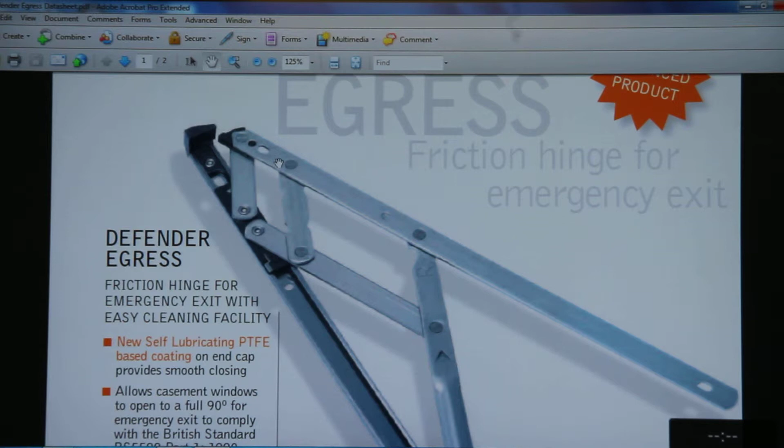Now we can see the Defender Egress friction hinges for the emergency exit with the easy cleaning facilities. So here we can see the plastic end caps. Due to this end cap, the moving in and out of the friction hinges is very easy, and it allows the casement window to open to a full 90 degrees for emergency exit.

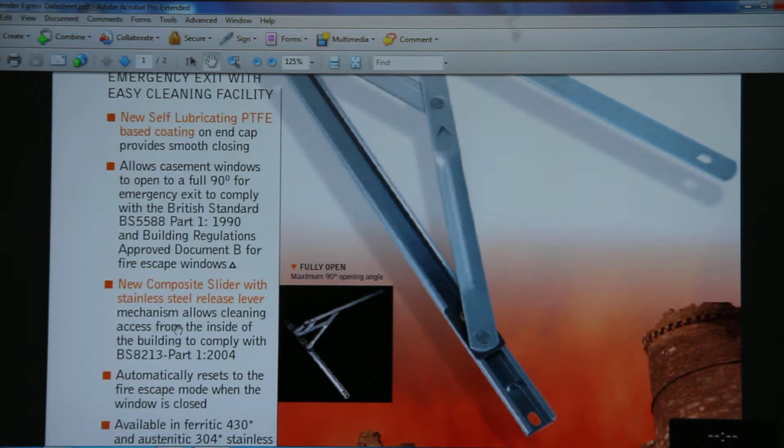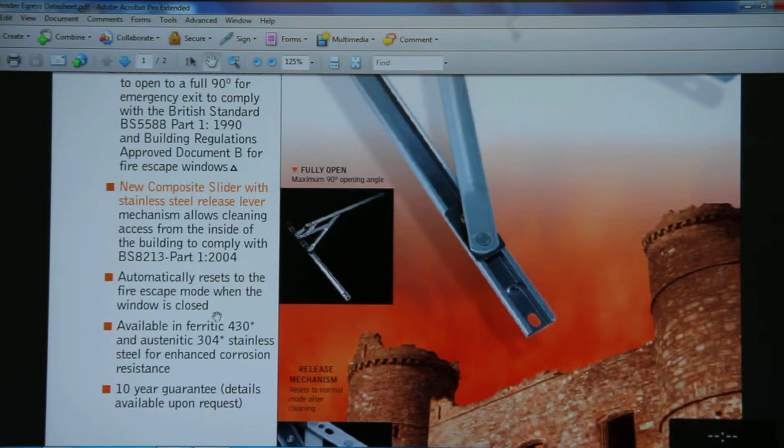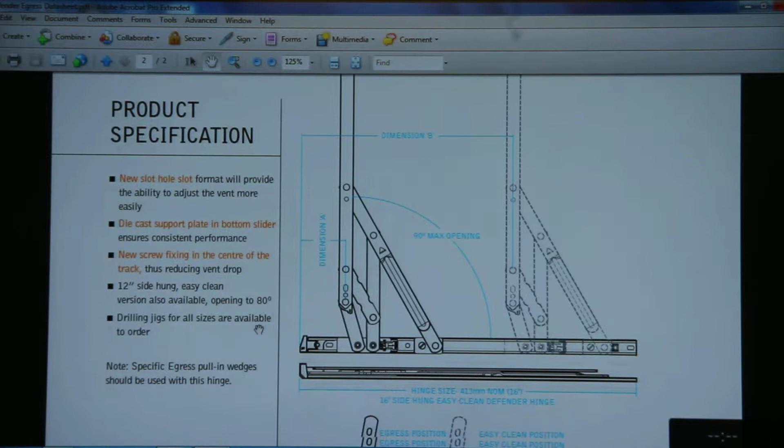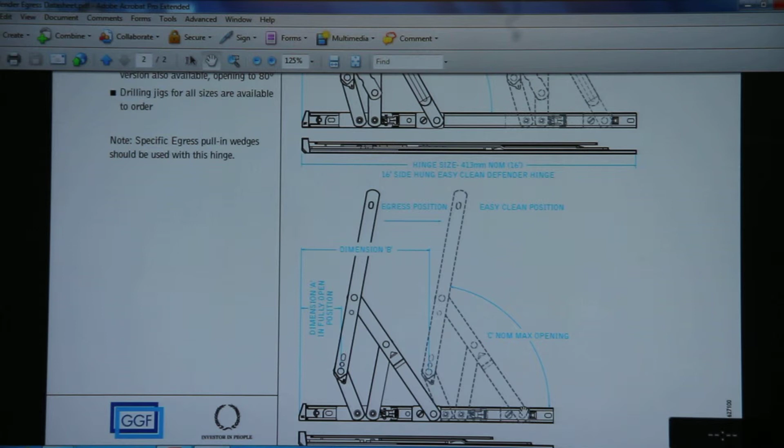New composite slider with the stainless steel release lever mechanism allows cleaning access from the inside of the building. Automatic reset to the fire escape mode when the window is closed. Now here we can see some more technical issues, like this is the opening angle of the friction hinge, how we can open and clean the window.

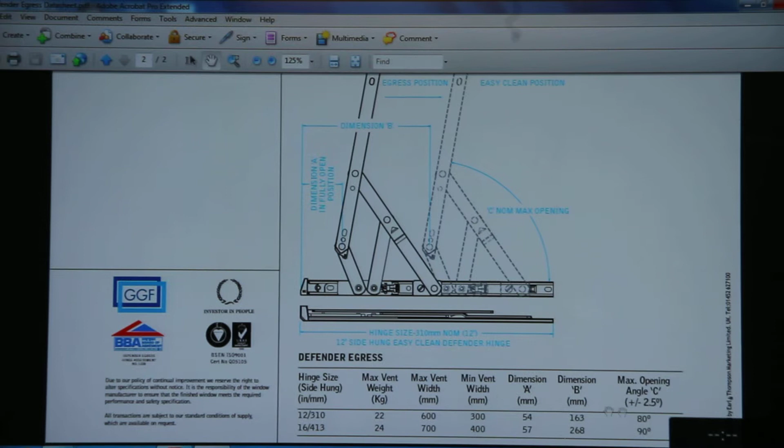Here we can see how much vent weight we require for the Defender Egress. We want 22 to 24. Due to 22 to 24, we can use the Defender Egress maximum vent weight, and the angle is 90 degrees. This is our 12 inches side hung easy cleaning Defender hinges. So this is the EDSC 12.

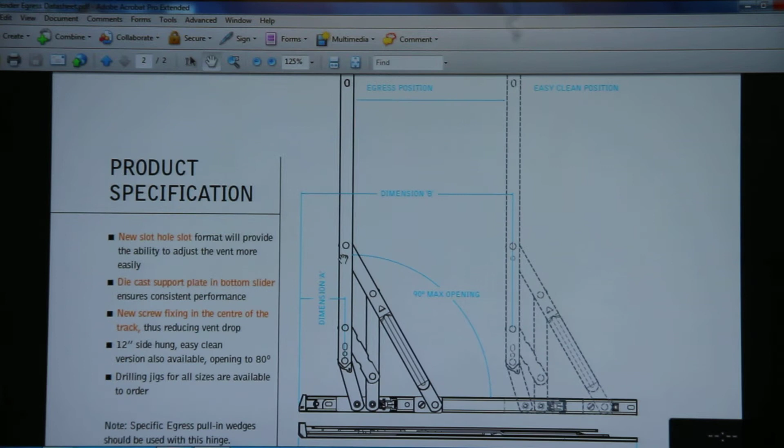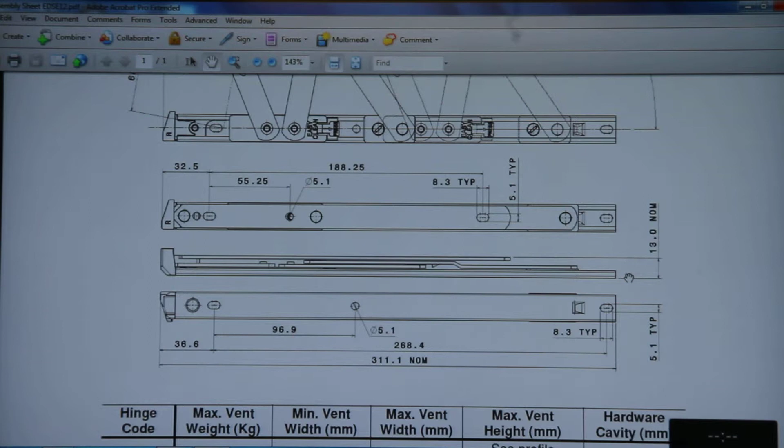This is the egress position, and this is the opening. We can see the 90 degrees. You can open it. Here we can see hole dimensions and the other parameters for the friction hinges. EDSC 12 is the 13 mm stack height. You can open this up to 80 degrees.

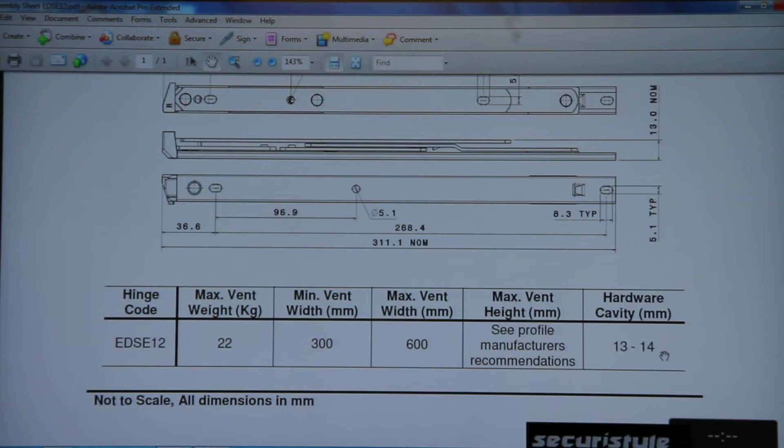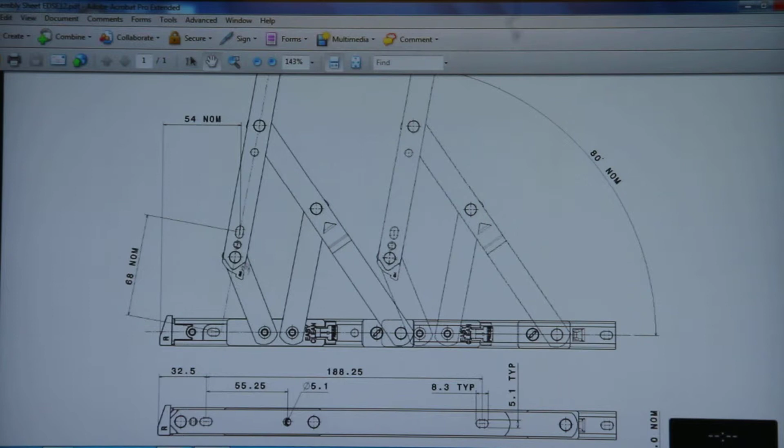These are the parameters for the EDSE12. Maximum weight it can bear is 22, and the maximum width you can go with the EDSE12 is 600, and the hardware cavity is 13 to 14. These are the easy cleaning buttons; by this we can easily clean the area of this friction hinge. This is the asymmetrical arrowhead. When it comes here, it will close, and like this we can close it.

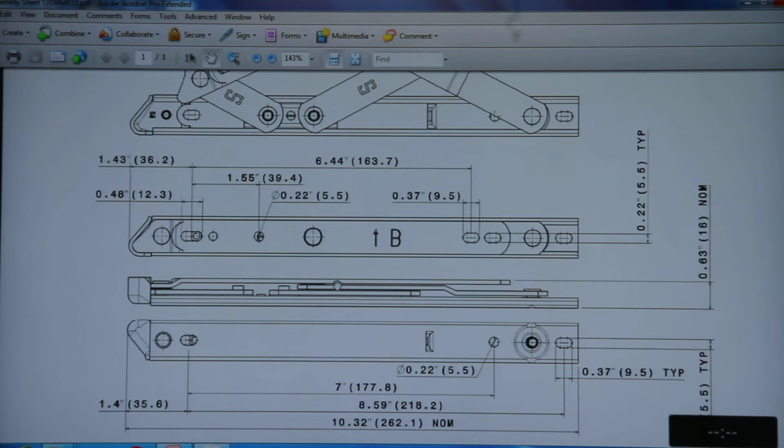Now we can see this Storm. There is one arrow. By this we can see how we can open the Storm balance. It's in 16 mm stack height. Storm 10 means 10 inches, and it stands for the Storm. The maximum height we can go is up to 635.

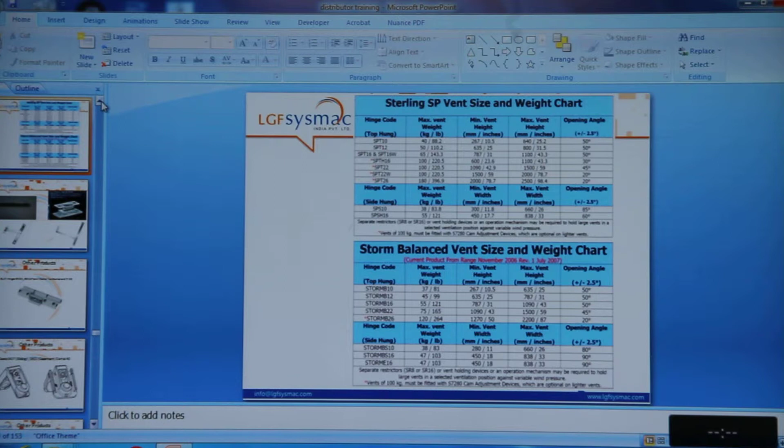How can we separate the friction hinges from Securistyle? 30,000 cycles giving the 100 years value, and each stay is tested in salt spray for 500 hours to avoid corrosion. Lipped plastic slider to avoid metal to metal contact.

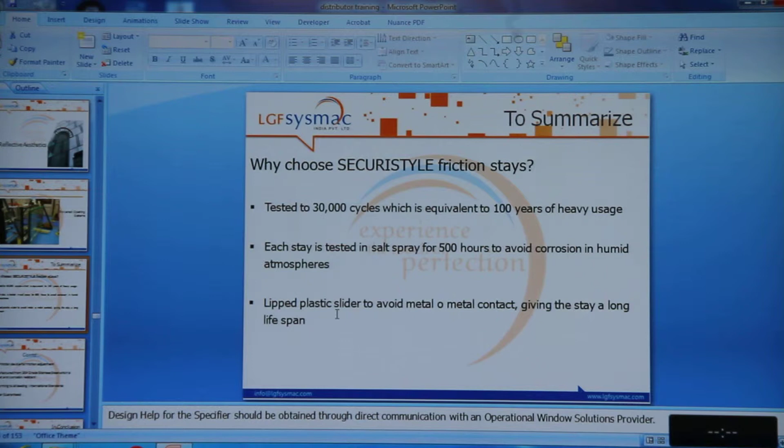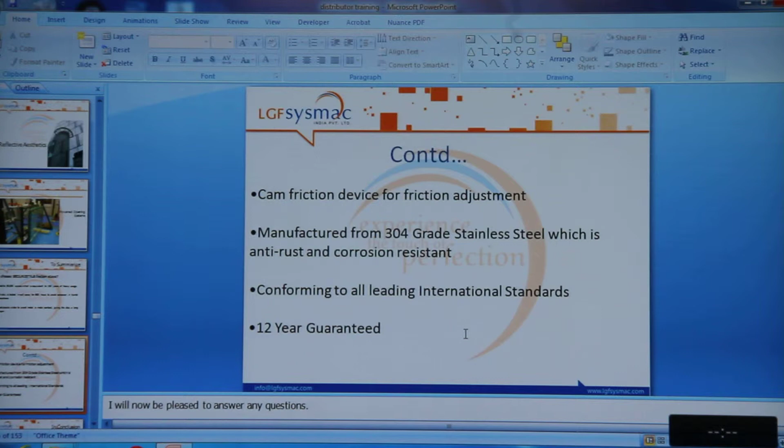Cam friction device for the friction hinge adjustment. The cam friction device gives the security of the friction hinges, so that they cannot go down from the positions we specified at the sash. Manufactured from 304 grade stainless steel, which is anti-rust and corrosion resistant, conforming to all the leading international standards, and 12-year guaranteed.

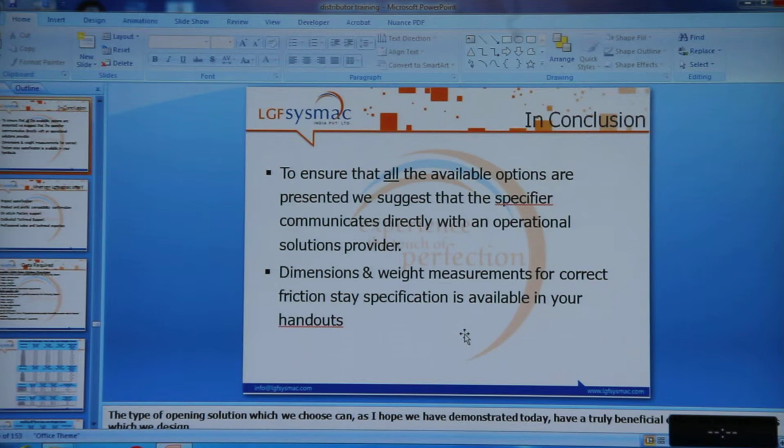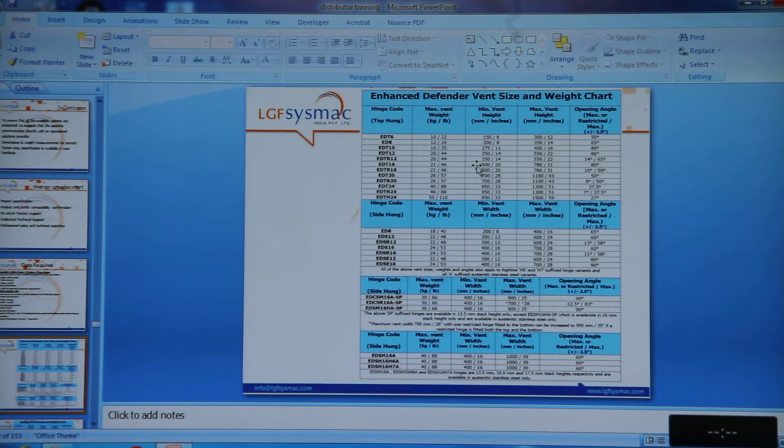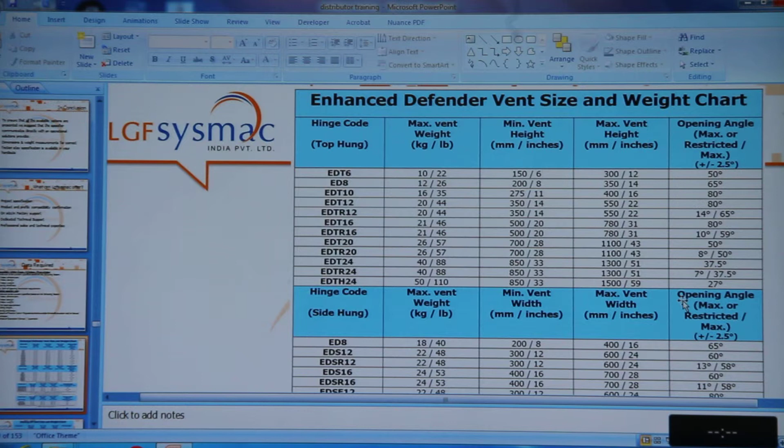To ensure that all the available options are presented, we suggest that the specifier communicates directly with the operational solution provider. Dimension and weight measurements for the correct friction stay specification are available here. Here we can see some applications. So from Securistyle, here is some arrangement for the top hung windows and the side hung windows.

So EDT 6, these are for the residential building application. These are the light duty application. The minimum height for the top hung window Securistyle friction hinges is 150, and the maximum height for the Defender is 1500. The opening angle is up to 80 degrees for the top hung window, and it comes in 6, 8, 10, 12, 20 and 24 inches.

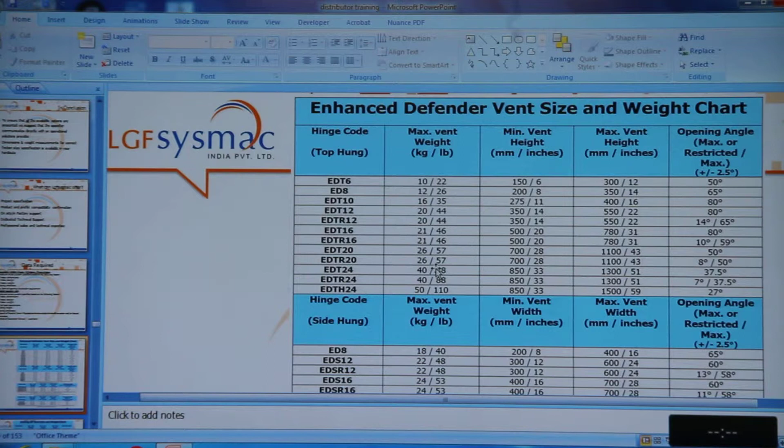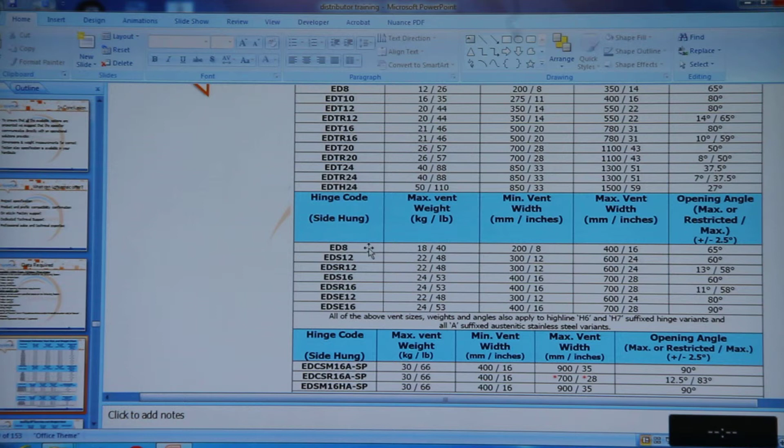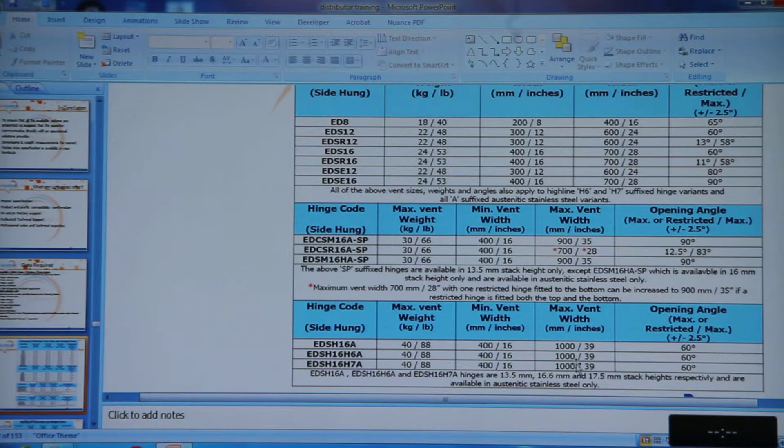For the side hung window, it starts with 8, 12, 16 inches, and the maximum angle of opening is 90 degrees, and we can provide friction hinges for the side hung. The minimum vent width is 200 and the maximum is 1000. Now we can see the Sterling chart. These are all about the Defender Egress.

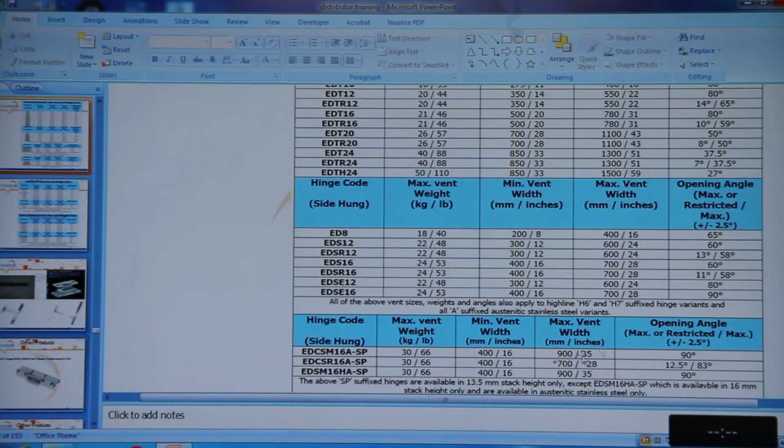This is for the Sterling, and Sterling also comes in 10, 12, 16, 22 and 26 inches, and it's also arranged according to the heights and angles. The maximum height for this is 2500, and the minimum height is 267 mm, and the maximum opening angle is 50 degrees.

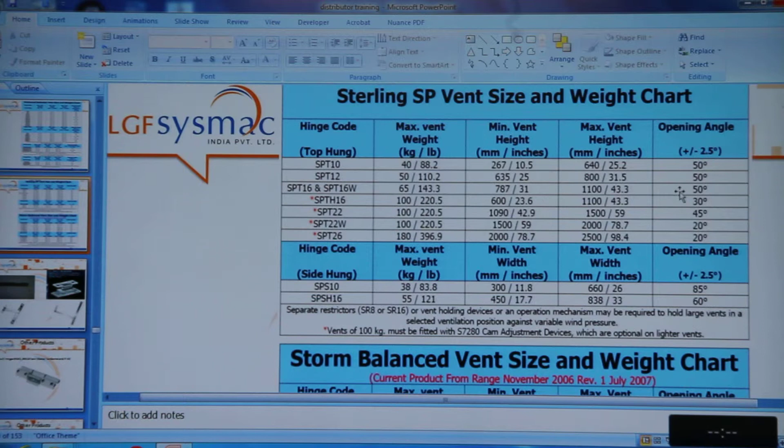These are some special Sterling which are for heavy applications. SPS 10, that means 10 inches, SPS H 16 inches. These are for side hung window applications, and it can stand 55 kg weight, and the maximum width is 838.

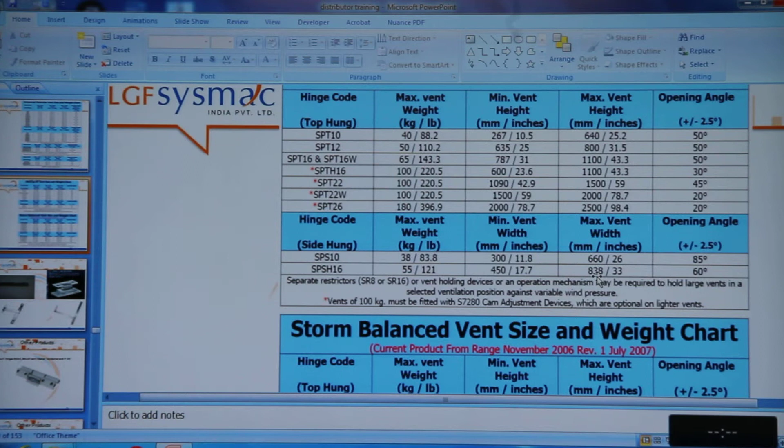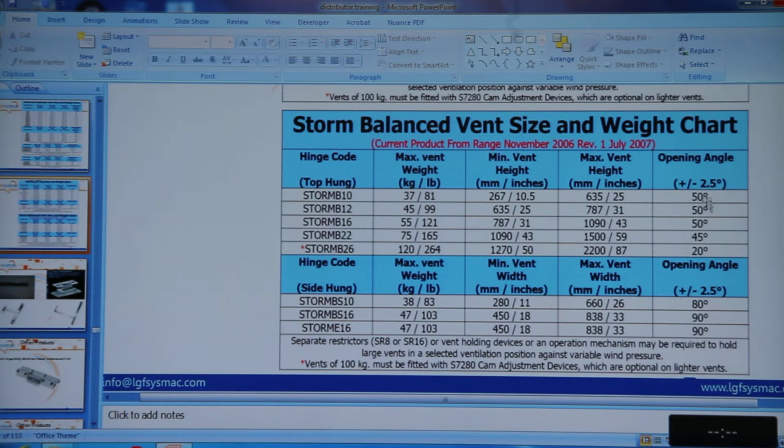Now we can see the Storm Balanced heavy duty commercial application. Storm also comes in 10, 12, 16, 22 and 26 inches, and the maximum height is 2200, and the minimum is 267. The maximum opening angle is 50 degrees. For the side hung, we can see the Storm 10, 16 inches, and the maximum opening angle is 90 degrees, and the maximum width is 838.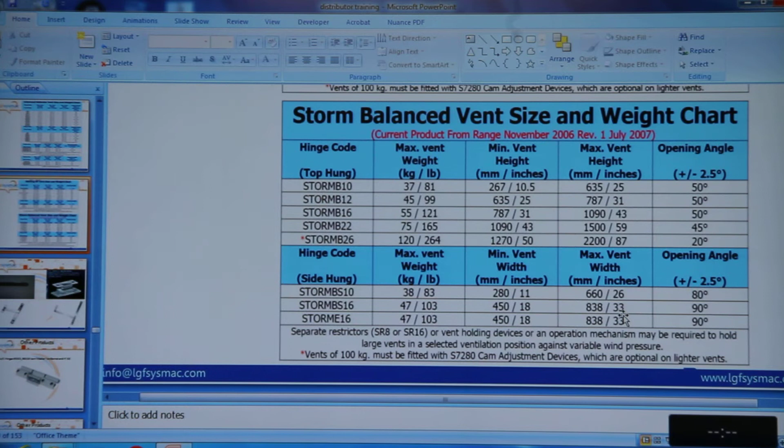Now we can see other hardware from Securistyle. This is the restrictor. It can restrict the opening for the top hung. After the friction hinges, if you want more restriction in the opening, you can provide the restrictor to restrict the opening. These are the pull-in blocks.

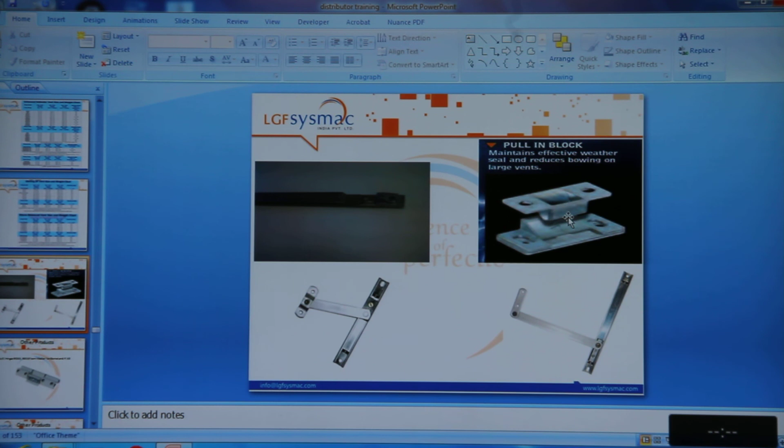Pull-in blocks at the above area of the top hung. We are providing the pull-in block to get the weather sealing and to reduce the stress at the top area of the top hung.